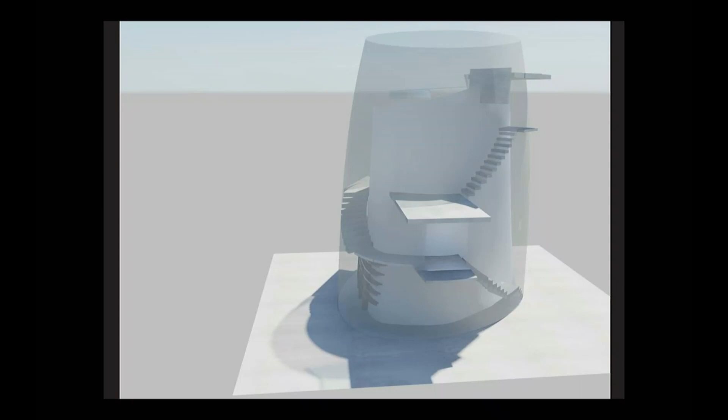In terms of its plan, it's 2 nested asymmetrical ellipses - kind of egg-shaped in plan, one sitting inside another with an interstitial space through which circulation travels. The whole thing also has an entasis, so it's folding in as well. It was a pretty solid workout for our math - this was quite a while ago, 15 years ago or so - and the first advice from the engineer was: buy shares in steel.

So the final project has these nested towers with circulation climbing up, and one climbs with little slot glimpses out to the far distance, some beautifully worked timber work. Sorry, we're going down - and so we've ended up in the basement, which is a cellar, a wine cellar. It's part of a winery up in the north.

The tower is considered in a sort of Gaston Bachelard kind of model - the idea of the basement, then the mid-ground, then the far observatory. So this is a place where one can hole up at the end of the night and lose all track of time because you're deeply buried within there. And then perhaps at dawn you ascend, passing a bedroom along the way, up to the observatory at the top.

And finally one gets this little slot view across the estate. I guess that observation, the horizontal, is something that's really interesting up in the north there, that the views of the sea and land are incredibly strong. But at the end of the day, as the sun moves round over the land, the ridges start to stand up. So the big story images of sea, island, beach and so forth are somewhat secondary to this layering of ridges in the far distance.

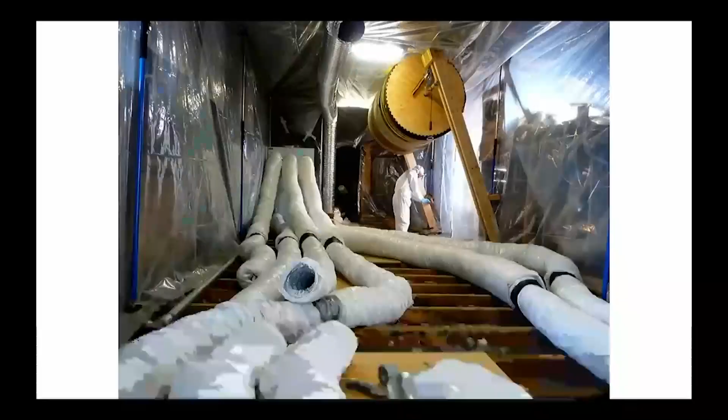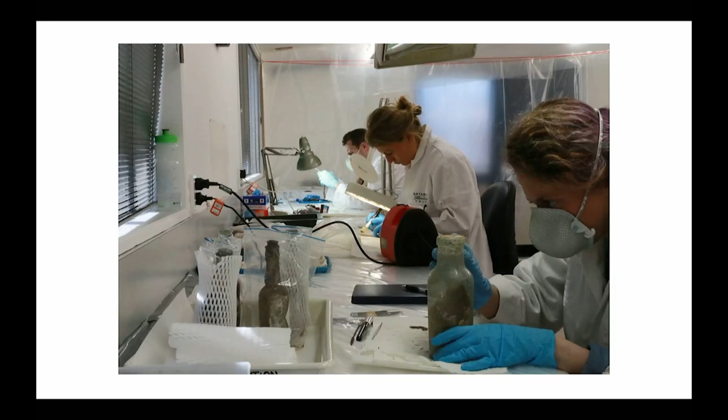This is conservation work at its extreme. Here the floor has been lifted up, ice and snow underneath the floor has been jackhammered out of the way, blowing hot air into the subfloor to try and dry everything out, and then replacing the floorboards. At the same time, in a little container on the water's edge, these people are conserving the artefacts. So broken glass is beautifully reassembled into complete objects, and stabilising the rust and so forth. But it's a tough environment.

And paradoxically now, the project is having to deal with the very advanced effects of global warming. So the issues are things like the lowering of the permafrost level.

For this hut it's okay, but one of the other huts, the first hut that Scott built, sits on what's called an ice lens, which is like a contact lens, but a vast great thing made out of ice. It's about 5 metres thick and it's starting to melt. So this very important hut is starting to drop. There are also erosion problems because the sea ice is not forming at the right time, and a whole gamut of stuff going on like that.

The really exciting thing is that there is some really serious science being applied to it now, and I'm fortunate to sit in meetings where we engage in issues of gas exchange and temperature variations, and mapping technologies like laser scanning. This really gives us a huge fund of data that allows us to make plans for how we're going to deal with the projects.

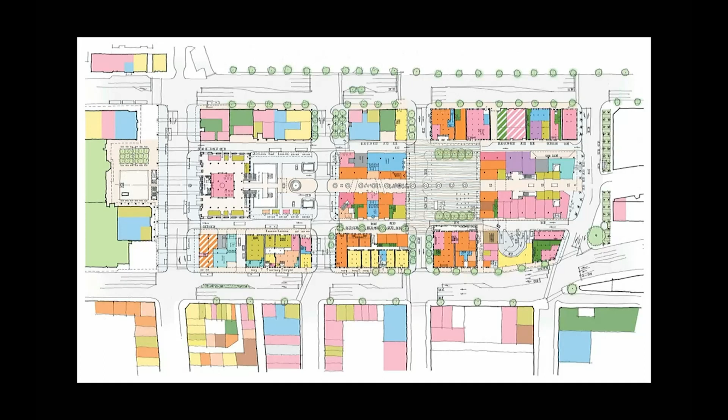With the eye, one could imagine walking through, and it became a sort of fact. That was a really interesting kind of strategy about how one might go about making spaces.

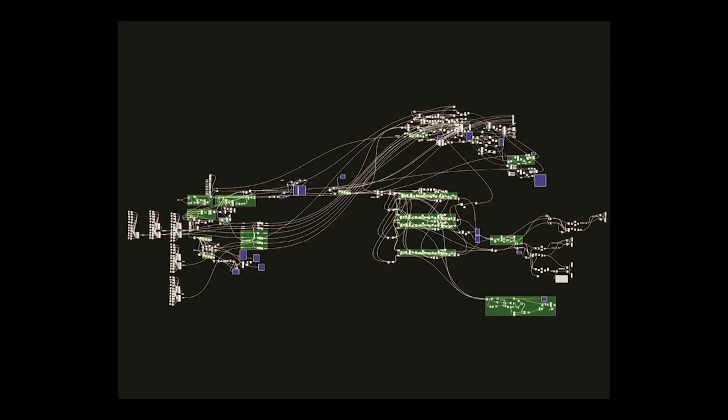This is the further occupation of Britomart. Early on there was a project for some low-rise buildings. The concern was a very sophisticated reconfiguration of Britomart and a sort of growing of the way it might work as a commercial and entertainment environment. I think the city was very lucky that the developer who won the bid had quite a lot of experience in the United States.

The developer brought a lot of that experience back here, and understood the importance of growing the city - that it was not a matter of making a building and putting a for-lease sign in the window, but that one actually had to carefully blow the embers of commercial activity inside the precinct and support the tenants. In fact, you had to create and grow your tenants.

So this is a project - you guys will recognise Grasshopper here - working with Milse, a little dessert restaurant tucked into a space that was originally configured as a public toilet. Prior to occupation, the very enthusiastic leasing agent for the developer said, 'I've got a tenant who can make something out of that.' So a project was generated to make something out of this quite robust environment, built, as I said, for a public toilet.

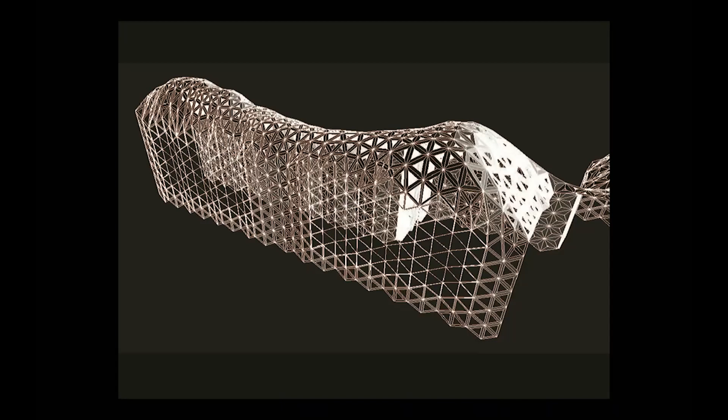Software generated laser cutting so that each of these little triangles was slightly different, with a common fixing point. Each triangle was numbered, so you would pick out number 1, put a little clip on it, get number 2, and by the time you got to about 150, it would start to curve into this complex form.

The degree of opacity would vary according to its proximity to the window. Where the contractor had felt it was going to be a very challenging task and therefore terribly expensive, they found themselves creating this in, I think, a couple of days or so.

Back to building on the hilltop in the north again. This is a project that commemorates what's described as the first formal engagement of Māori and Pākehā, identified as occasioned when Marsden arrived here under the aegis of Ruatara, the local chief, to bring Christianity and, I think, muskets and a few other bits and pieces.

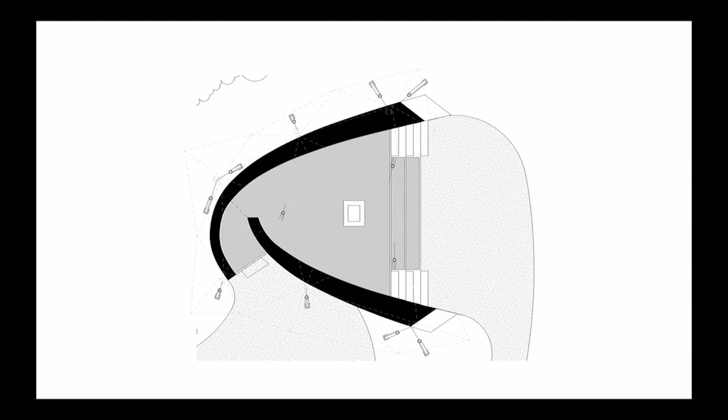This project was to commemorate the 200th anniversary of that sermon on Christmas Day that Marsden delivered. It's a pretty simple form of a building - two rammed earth structures facing out over the valley below.

The project had been through a large number of iterations. We started as a kind of library, school and accommodation, which was a very Eurocentric reading of the history and the site. We backed off and formed a working group with iwi representatives and some sculptors, and started to understand the land as representing two sides of a coin.

On the right-hand side was the pre-contact land - you can see remnants of the pā site here, and the trees up there, which we understand was the place where Ruatara's body was prepared for burial. On the left-hand side of the valley is a pastoral experience of the land - a very Eurocentric use of land, with 8-wire fences and sheep grazing.

So it seemed, after the intensity of trying to design a building, that some observation of these two sides of the land would be a much more reflective and potent way of marking that time.

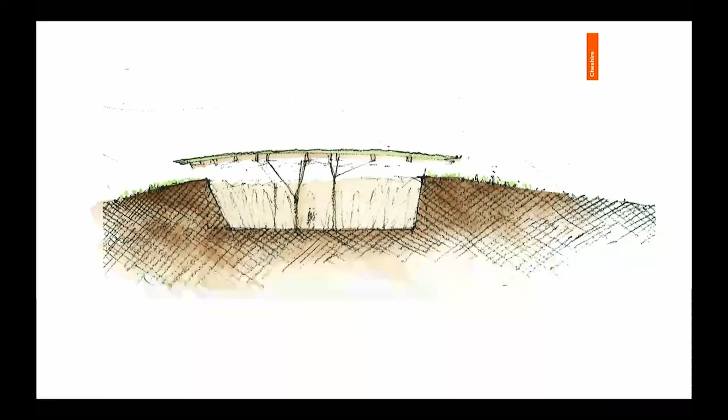It had as its genesis the idea that the land might be lifted up and propped up, with some play on the idea of a hypostyle hall - maybe the pongas might give rise to an order of columns, with this horizontal strip of land and bush behind. It didn't happen, I hasten to say, and probably not a bad thing.

This is a drawing of Nat's for a project up on the Kaipara - two small buildings, very small, about 5 metres square I think, sort of two peas in a pod conceptually, but quite different in character. That's partly to do with the interior.

This one here is plywood, the other is a black formply. But the openings are quite interesting, because whilst one looks out, one also looks in - but not only looks in, one has to get in through the window. This is the only way one might access this building.

The door slides away in behind the weather screen, and you clamber up over the rock, and in you go. On the other side, the downhill side, again the window slides in behind the weather screen, and it becomes a seat where you are out in the site.

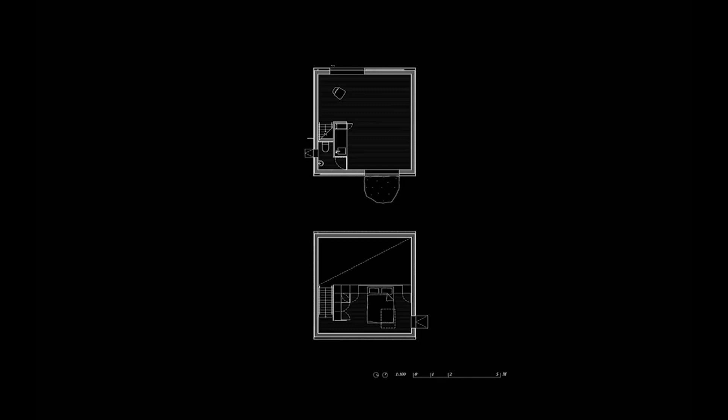Very simple plan, single storey with a mezzanine over half of it. You see here the other side of that building - its twin, the black-lined one, with a little hint of the kitchen on the left, a brass kitchen. You see a little more detail here.

This is a bit more extravagant in its occupation of land, and I was quite keen on a building that revisited the glasshouse model - the kind of pavilion, you know, the Philip Johnson, the Mies van der Rohe. But here, I'm a bit disturbed.

I need to make a confession here. The cone on the left should have two flues, and a photographer was so offended by the flues poking out that he's photoshopped them out. I've had a sort of ethical dilemma as to whether I should show the slide or tell you about it, so I've come clean.

When the offshore owner saw them, he said, 'This is appalling, what a failure. Get rid of them.' So we engineered some flues that would telescope themselves away and then pop up to distribute smoke. Thank God the cost put them off, because the detailing and weathering of it would have been a nightmare.

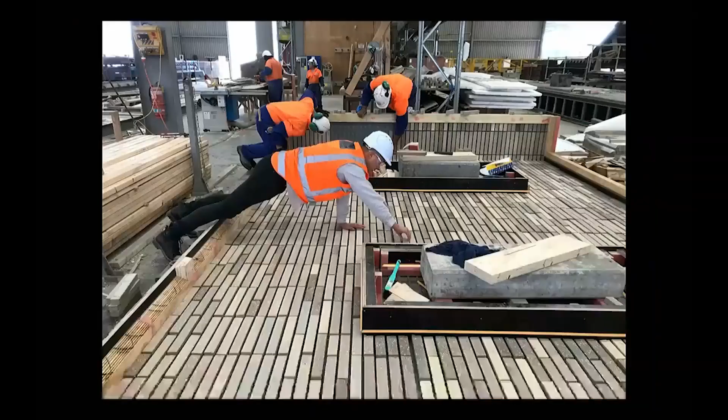So the breaking down of the mass of the building into component elements, and of course the use of brickwork, which was an extraordinary bit of engineering and facade architecture, involved some extraordinary work. This is the bricks being laid into a mould at a precasting yard. Concrete is cast onto the back of it, and then the brick-clad panels are taken to site and offered up into place.

Again, there is this issue of humble special again, but here the materials are a little less humble, I suspect. It's very elegant joinery and some beautiful craft work. I'd really like to reference the work of Emily Priest in the studio, who has made a significant contribution to the way the building uses local materials wherever possible, particularly with respect to interior fit-out. The fabrics, artworks, and much of the interior fit-out is locally sourced.

I talked before about the nibbling through space that the very first Country Club project heralded. In here, this is the formation of another laneway connection between Customs Street and the centre of Britomart, and therefore, in the fullness of time, we hope, down to the water's edge. This is seeking to obscure the difference between public and private space, so it drills through an existing building, then doglegs around, and then opens back out onto the streets.

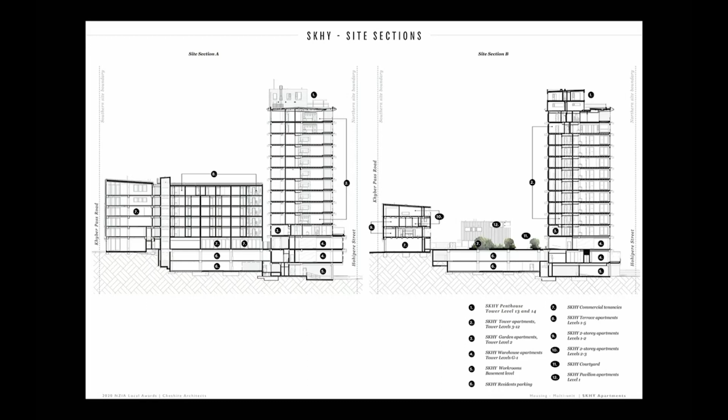High up you get this extraordinary view of the city. It's on a very high part of the city, so it offers this enormous view, and it's 360 degrees. You're around the other side of the building, you look out to the Manukau Heads.

But as I said, on the lower levels, this building had been plopped up alongside. It's a car park down below and then some apartments up above it. This is before we'd done any work on the building.

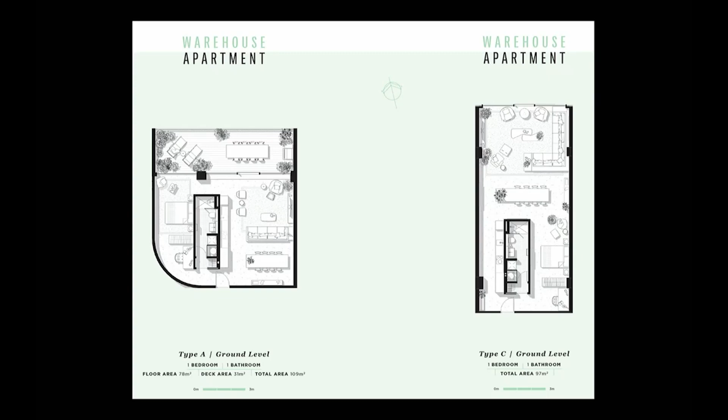And so we generated some what we call warehouse apartments, which I'm really rather pleased with. They're rectangular boxes with no view whatsoever other than about 7 metres or so across to that metallic building. We concentrated on trying to make everything as big as we possibly could and condensed all the necessary rooms into one plywood box, which is that dark outline box. So it has laundry, bathroom, a little storage, and then the kitchen clamped onto one side, with no other separations inside, so that people can configure bedrooms and work areas and living areas as they see fit.

This is a typical one of the warehouse apartments, not our fit out, I hasten to say. This is done for real estate. But you can see there the plywood box with the bathroom and so on, and then the kitchen on the right-hand side.

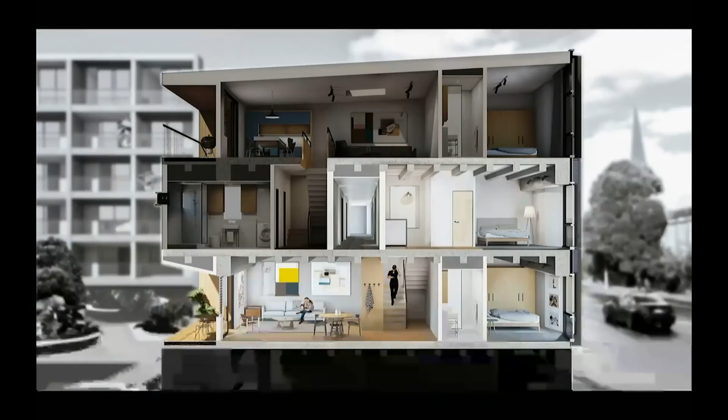We also, on the third stage of the project, got an opportunity to do the great over and under apartments, so circulation through the middle here, then coming in to one room and then upstairs to an apartment that goes right through, and the corollary coming in here, bedroom here, down, apartment that goes all the way through.

That's lovely because it gives you these apartments that are double-sided, so you get great ventilation. The other thing is they're quite useful in the sense that you end up with a sort of isolated bathroom, isolated bedroom here for example, whereas the main living is down here, the main bedroom down here. So they're quite useful for kids coming home, or that kind of arrangement of some privacy or common living on the ground floor, and then these little isolated pods.

The downside is there's actually quite a lot of staircases. A lot of staircases.

Out west, a lot of the work we do is kind of master planning, and this is on the back of Britomart pretty much, in that we gained a lot of experience at Britomart, and also we were quite carefully educated or mentored at Britomart into those things which will make a successful commercial environment, well, a successful, sustainable public environment.

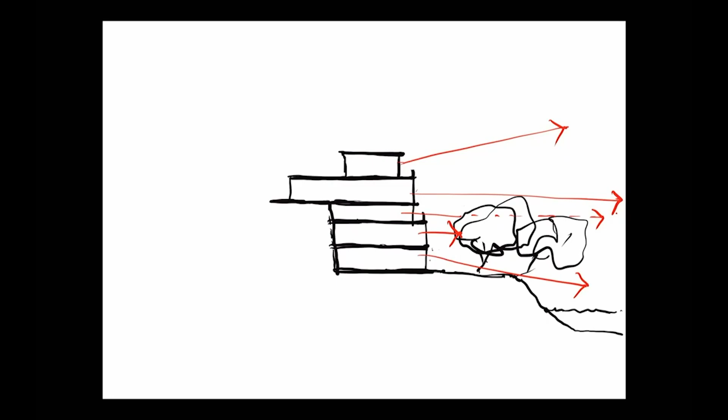The building is really about rambling down the cliff from the flat land above on the roadside on the left, and is really a story of different engagements with that long view. Circulation is up and down this lantern. It's a very simple parti for the house.

There's this stair lantern, a big wall of polished stone that runs up and down through it, and then on the other side, a series of stacked rooms starting from living space down to bedrooms and then down to a game space at the bottom. This black thing here is this wall running through the building, separating public and private. You can say it was a bit of Louis Kahn, served and servant spaces, those things rattling around.

So high up, one has this long view across the northern approach to the harbour and out to Rangitoto, through the living level where the trees are starting to become more of an element. Then one goes down, starts going down this lantern. The trees start to obscure the view and manipulate the light.

At various stages the stair folds back on itself, and as you appear here, at the penultimate level I think it is, the polish of the stone reflects the tree in front of you, and then you end up in this private zone at the bottom.

We revisited that project, I don't know, 5 or 6 years ago, and formed another wing to it because that house was very skinny, just stepped its way down the cliff, and it was only about 8 metres wide at the most. Here we revisited it, and this is the tree that I'm delighted to say survived not only the tempest but the contractor.